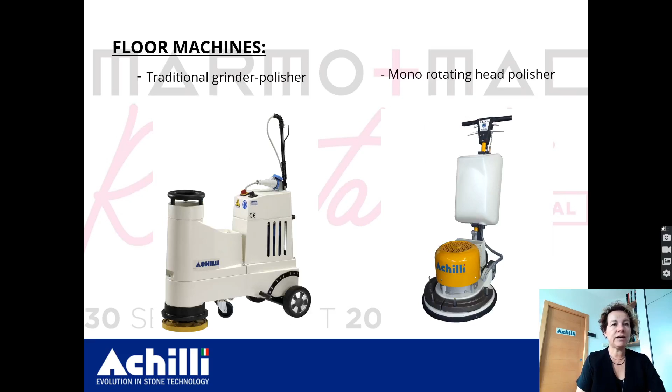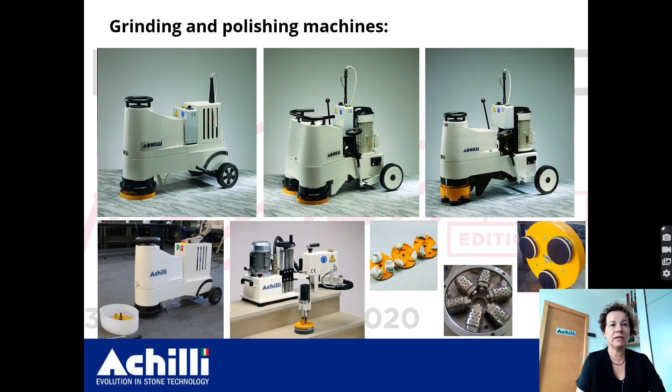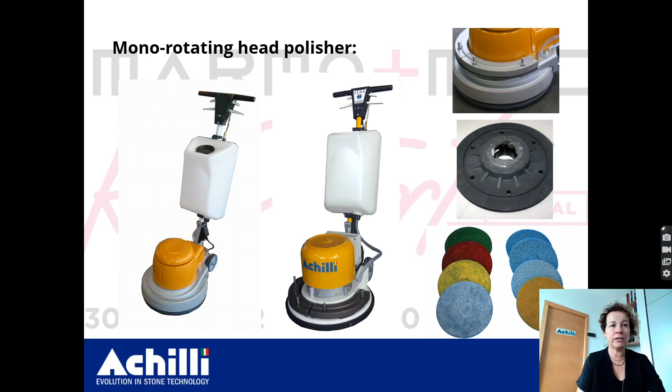The floor machines are divided into different types of product. The traditional models, capable of unmatchable grinding and polishing finish on all types of materials. The mono-rotating head polisher, the most user-friendly machine, used for removing superficial scratches, warranting a high degree of polishing, but not capable of grinding or leveling the surfaces.

One of the main problems that floor grinding operators have to face is the uneven surface, which, if not properly ground, even when polished, will give an unpleasant final result, looking more like an orange skin with hollows.

The long experience taught us how to treat the different materials. With the help of our tools supplier, we are proud to state that we have a solution for every type of floor, even the toughest ones.

We have models with single and three-phase motor, with fixed or variable rotation speed, with Cassani and Frankfurt plate, planetary head with 3 or 4 abrasive rollers, and accessories for bush hammering and brushing.

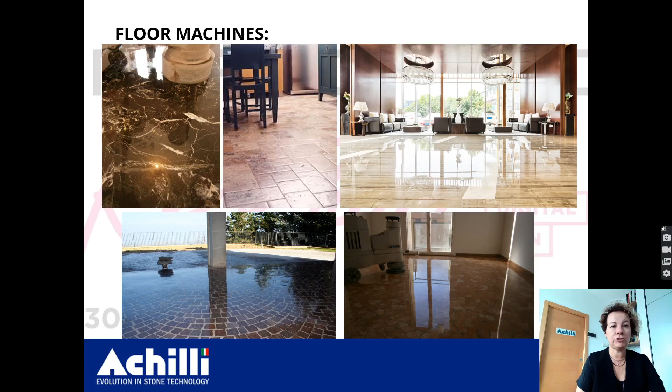The construction saws can be divided into 3 types of products, all with a built-in water recycling tank. The smallest models are made for tiles, having a rubber work table, available with rolling table or sliding head according to the client's preferred way of working.

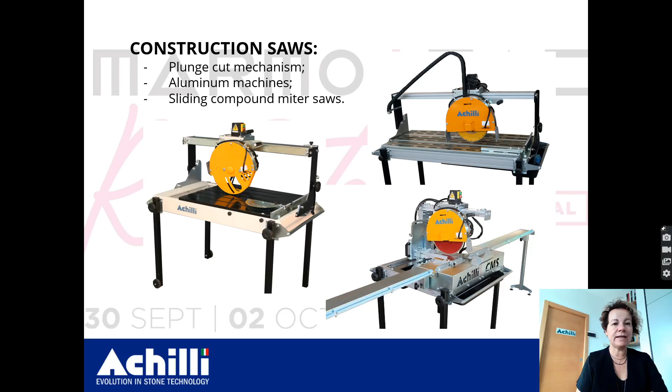The traditional construction saws feature a plunge cut mechanism to cut any type of construction material, available with a stainless steel water tank or completely made of aluminum. The special models are equipped with larger blades from 650 to 1000 mm in diameter.

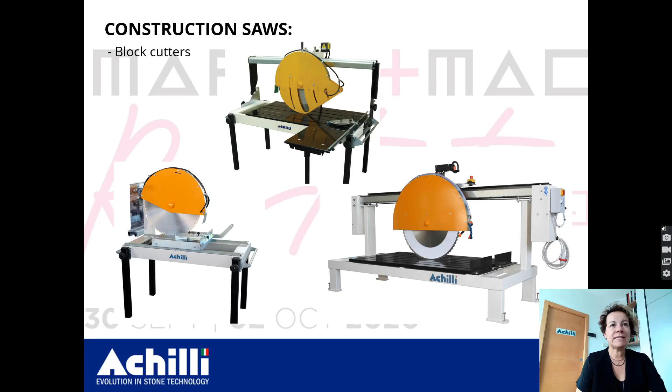According to the type of job the client has to perform, we can recommend the specific model. What makes a difference in the choice of the correct model is the type of bridge, as its shape influences the good results of the job.

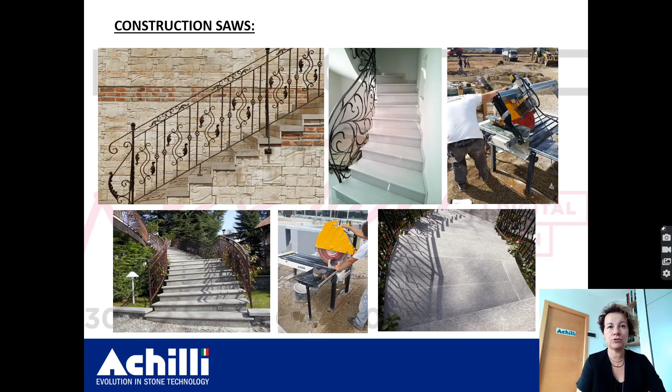The stone machinery represents 65% of our production. They include a huge variety of products, and it's almost impossible to determine specific models because we create new models almost every month. As I was mentioning, Achilli's mission is to give solutions.

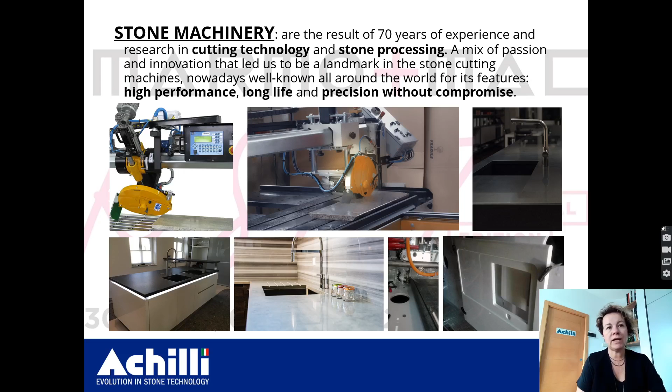This is the reason why we customize our machines. We create what the customer wants and we enjoy doing it. To help you visualize our activity, I will try to highlight a few models.

I will start from a basic cutting machine, in between a construction and a professional stone cutting machine. The bridge of this saw is very precise, rectified on 6 surfaces. A unique model where we put attention on details.

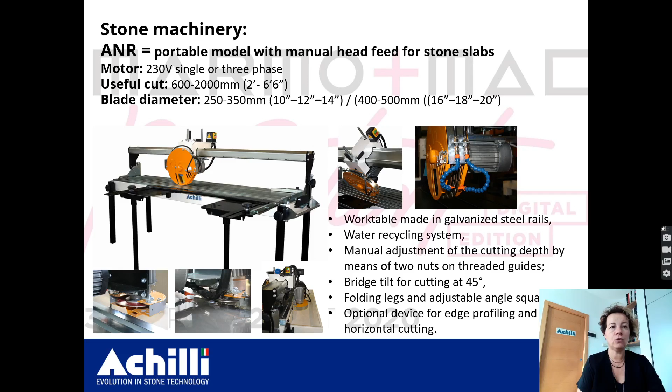A double screw for vertical movement, good for construction materials but necessary to perform accurate cuts on granite and hard materials. The possibility to mount more than one blade and carry out anti-slip grooves on step surfaces. The possibility to add an optional device to profile and polish straight edges made this machine a must-have for all stone fabricators.

The high demand for being independent in cutting full slabs brought us to develop a line of saws with fixed bridge, with a cutting capacity up to 3,500 mm, with variable features. Motors with different power, the possibility to have a variable speed on the main motor, as well as the possibility to mount different blade diameters.

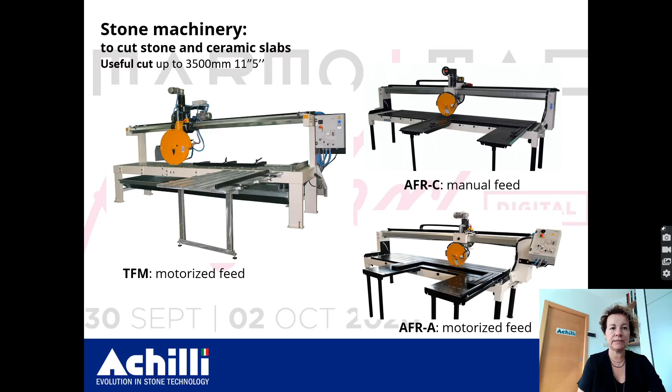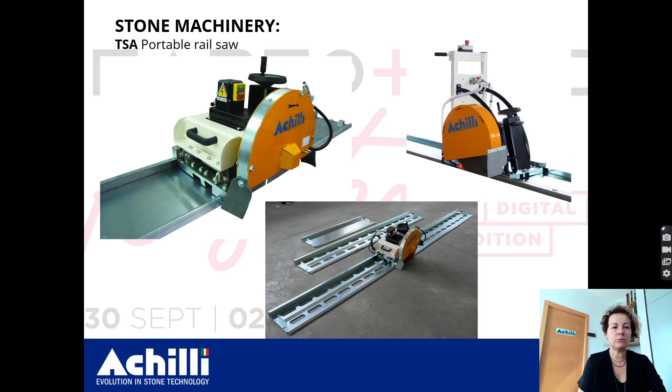Everything again with a long list of optional accessories, all designed to make fabricators' job easier and most accurate. For those who need to cut a full slab on site, we have the solution too: a rail saw equipped with rails in different sizes, which can be easily carried into a van or even a car, and that is able to cut granite up to 4 cm in thickness.

Another important item of our production is the miter saw, which has been getting more and more success over the last few years. By positioning the slab face down, 45-degree cuts are perfect on any material, as the thickness difference on a non-calibrated slab will not affect the perfection of the cut.

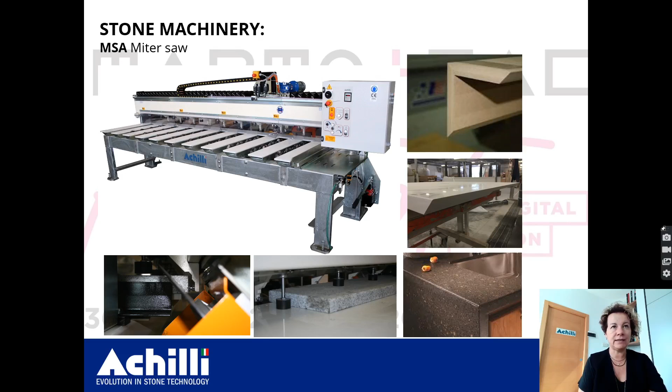And now, our core business, the production of bridge saws. From the simplest model, where everything is moved manually, up to the more sophisticated solutions, where a CNC unit controls all the functions of the saw.

Bridges mounted on existing concrete walls or dedicated posts, or better, monoblock frame, allowing you to install the saw with no need to have a technician coming from Italy.

Fixed table, turning table, tilting table, or better, 2 or 4 position manual head rotation, or hydraulic head rotation by push buttons, or again, fully automatic.

The possible solutions are so many, and we are happy to study with you the ideal one according to your real needs. Yes, this may take some time for our production. We seldom have saws ready in stock, but I think it's priceless to wait a little longer and get what you really want.

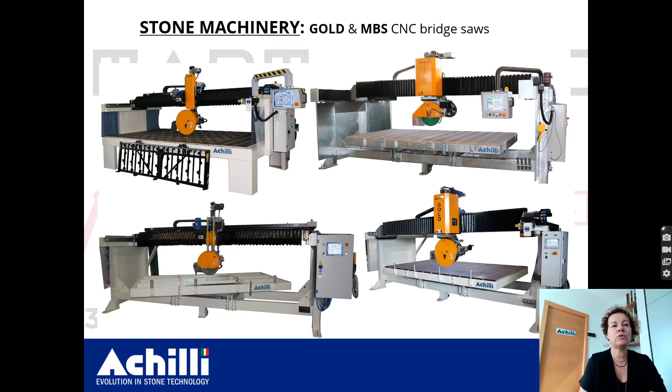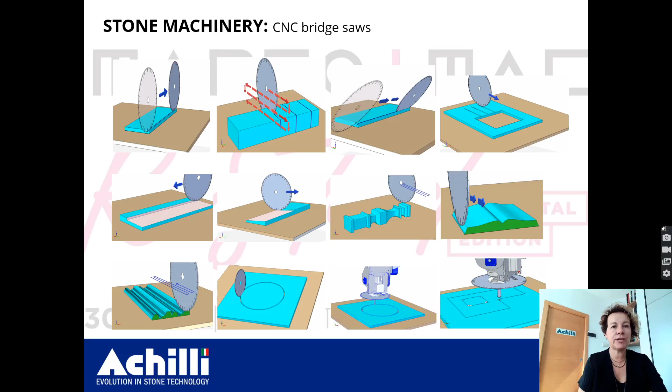All saws with CNC can be equipped with different levels of software, from the basic version up to the upgraded and most sophisticated ones. But all of them are user-friendly, with an interface and guided programs to help you create what you need, from a single cut up to a complete cutting program.

In the pictures shown, you can see some of the jobs performed by our customers.

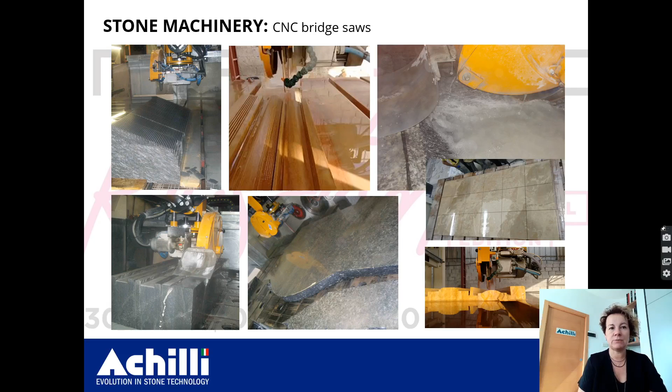I conclude introducing another type of product we have, which I like to define manual working centers. They can do exactly what an expensive CNC working center will do, but all the processing is manual, following a template. The result is indeed the same, good looking and accurate, as if it was manufactured on an expensive machine.

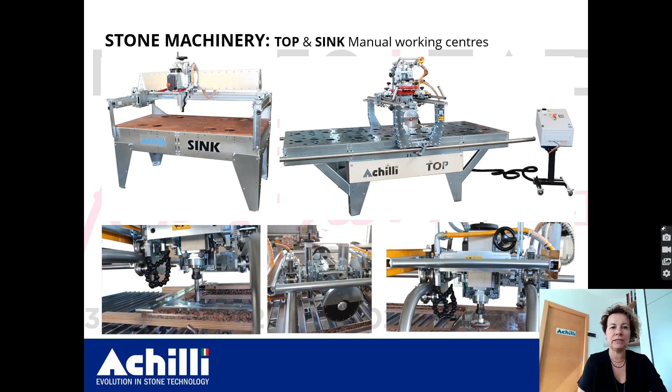The good thing is that these solutions are tailor-made for small fabricators who make a few kitchens per month, buy Chinese slabs, sometimes need to rectify the surface, and want to profile and polish the edges.

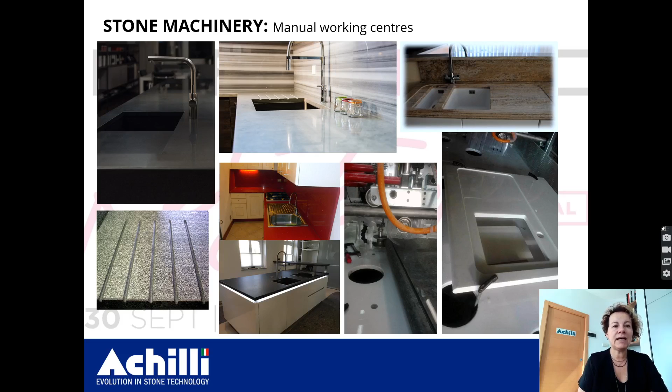We consider the TOP and SINK models an all-in-one machine. Purchasing them is like having a cutting machine, a profiler, a polisher, a single head surface polisher, and much more. The only limit is your fantasy.

I know I gave you quite a few information, hoping to have aroused lively interest.